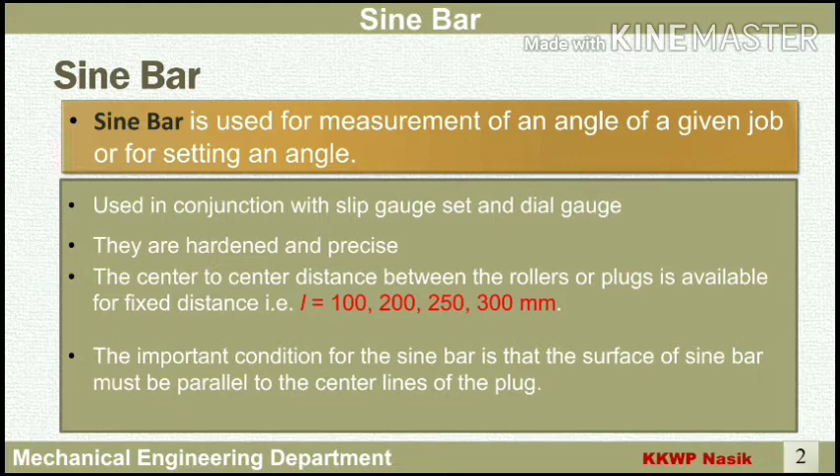Sine bar is made up of high carbon, high chromium steel, and all the surfaces are grinded and lapped. It consists of two rollers of same diameter fixed at a distance, that is L. The center to center distance between the rollers or plugs is available for fixed distances, that is length equal to 100, 200 mm, 250 mm, 300 mm. The important condition for the sine bar is that the surface of sine bar must be parallel to the center lines of the plug.

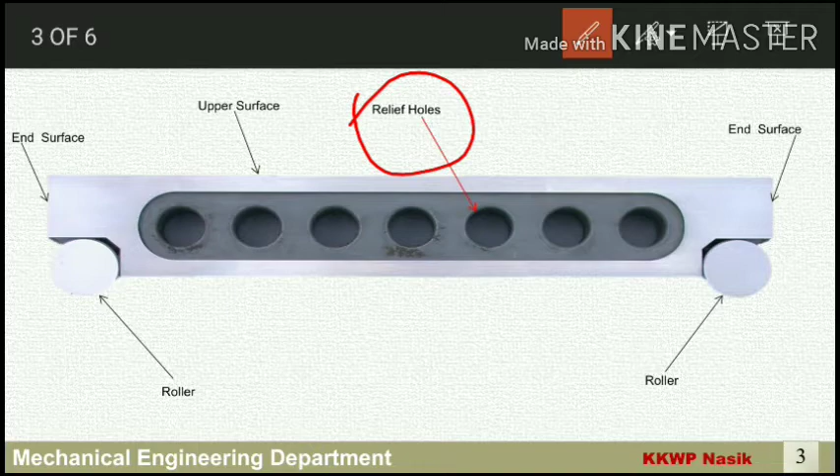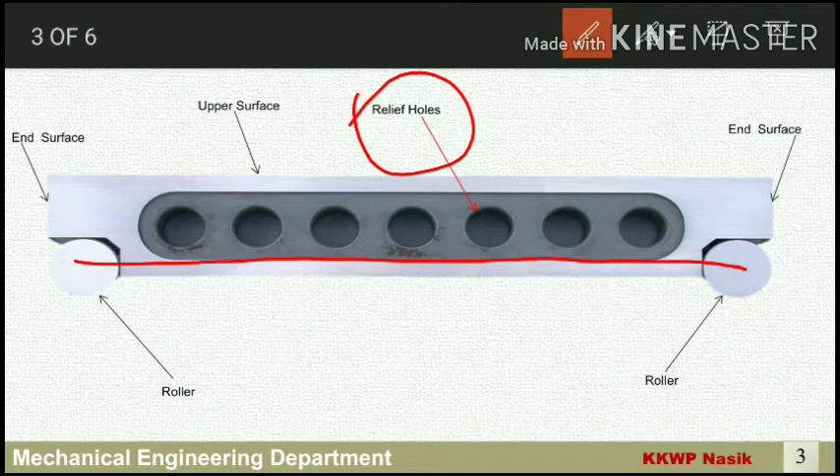Here you can see the sine bar. The upper surface and the end surfaces are grinded and lapped. The relief holes are provided to the sine bar. The purpose of relief holes is, one, gripping purpose, and second, to reduce the weight of the sine bar. The two rollers are provided to the sine bar and the center to center distance is length L, that is length of the sine bar.

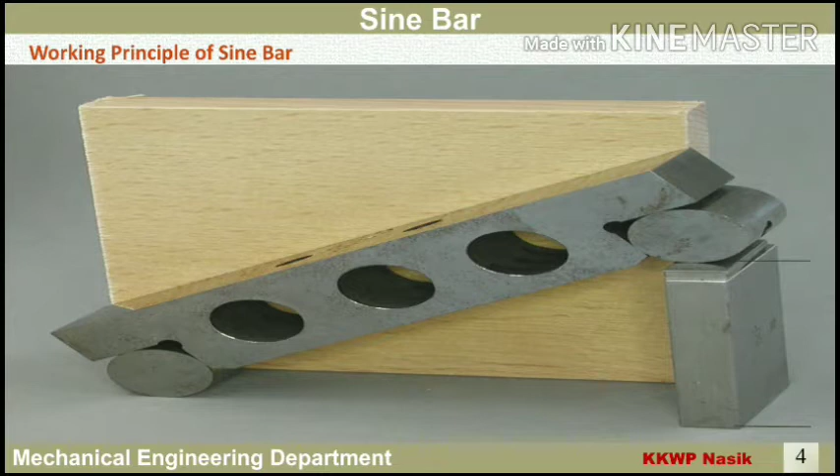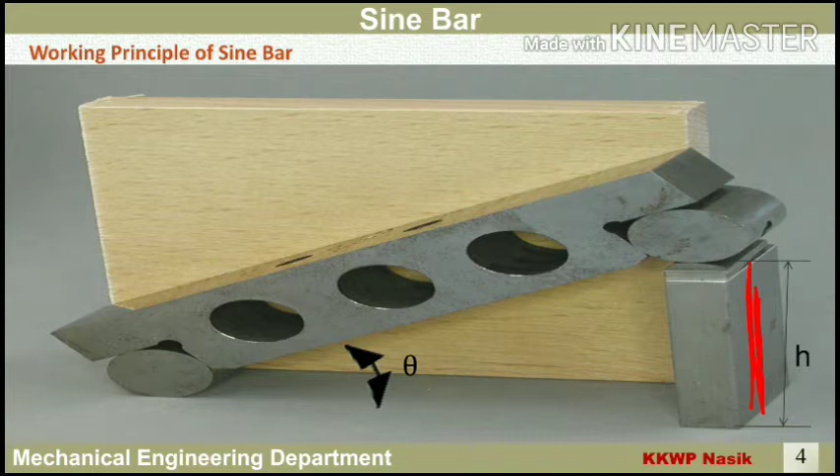Working principle of sine bar. Basically, sine bar works on the principle of trigonometric sine function. How it is so? Let us see. If one of the rollers is lifted and appropriate value of slip gauges, that is at height h, are placed, then we get the right angle triangle. Here you can see, if we lift the roller, then we get the theta, height h and length L, that is the center to center distance, and we get the right angle triangle.

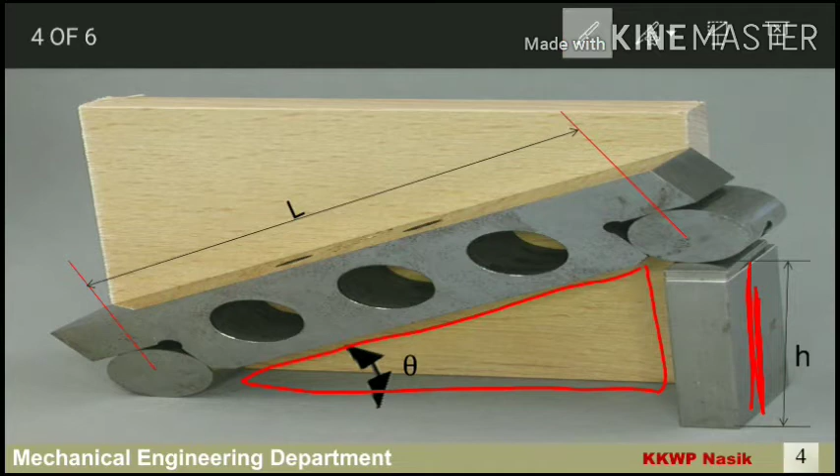From this right angle triangle we can calculate the angle theta. Now we have two known values, that is height h and length L. So opposite side of angle, that is h, upon hypotenuse length L is nothing but the sine theta. So from this trigonometric function we can calculate the angle. So sine theta equal to h upon L. Therefore theta equal to sine inverse of h upon L. To calculate the theta, the sine function is used in this equation. Therefore the instrument is called a sine bar.

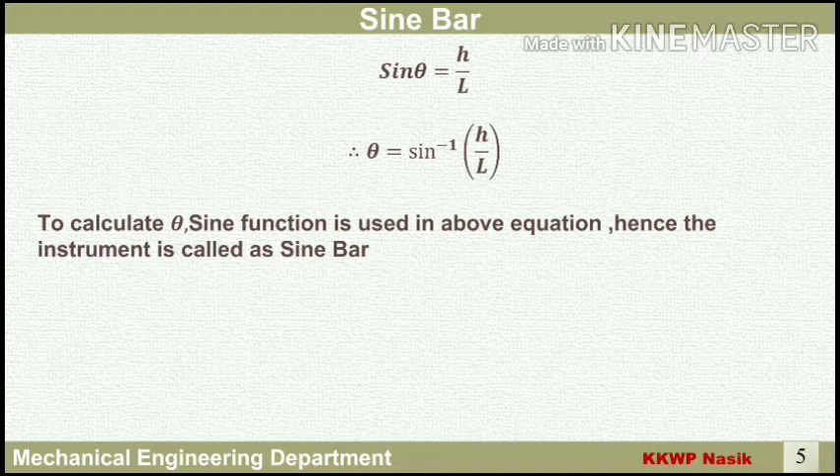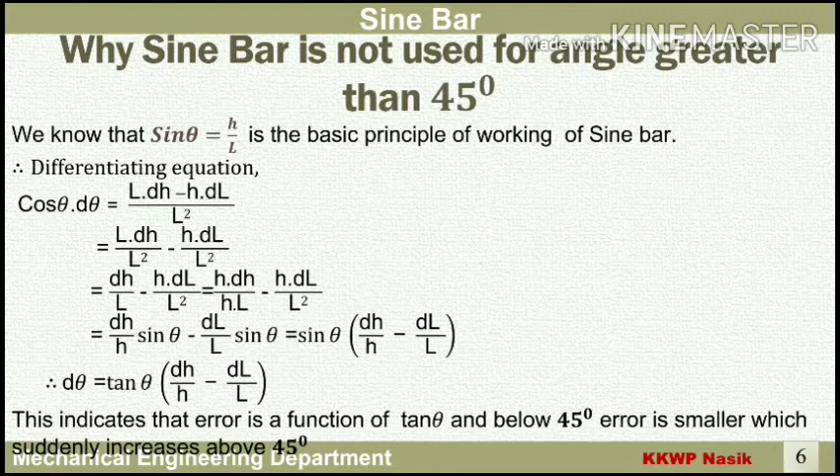There is one limitation of a sine bar, that sine bar is not used for an angle greater than 45 degree. Why it is so? Let us see. We know the basic principle of a sine bar is that sine theta equal to h upon L. So let's differentiate it. By differentiating we will get cos theta into d theta, that is derivative of sine theta is cos theta and derivative of theta is d theta, equal to L into dh minus h into dL upon L square.

This term is by differentiation of h upon L, that is by the divide rule of differentiation. Therefore L into derivative of numerator, that is dh, minus h into the derivative of denominator, that is dL, upon square of the denominator, that is L square. For next step, separate each term, that is L dh upon L square minus h dL upon L square, equal to, here one L gets cancelled, therefore dh upon L minus second term as it is, that is h into dL upon L square. Now for next step we have to compensate h.

For that, divide and multiply by h. I have multiplied and divided by h in the first term. So instead of h upon L, we can write sine theta. So I have written it, and only one h is remaining, therefore dh upon h into sine theta. And in second term, instead of h upon L, again we can write sine theta, so dL upon L into sine theta. We take sine theta common, in bracket we will get dh upon h minus dL upon L.